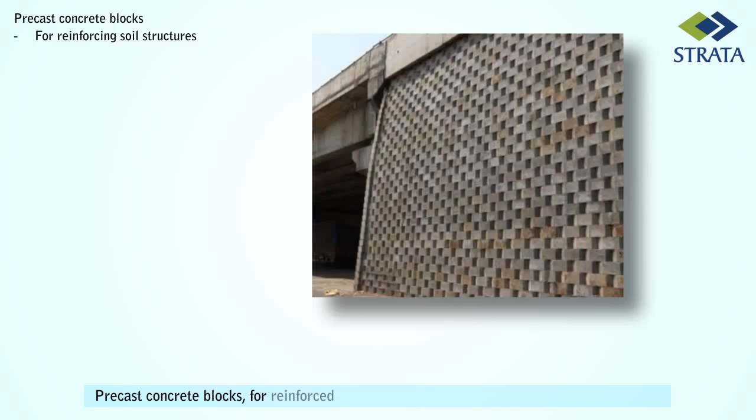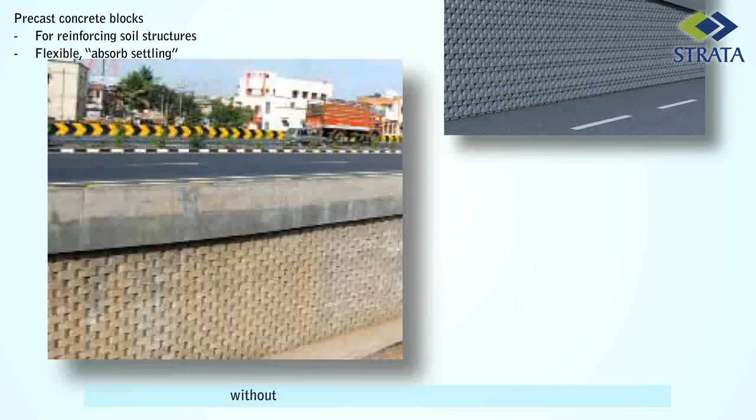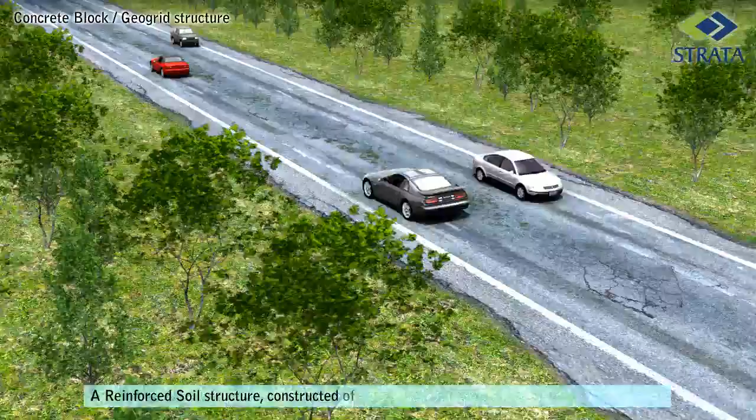Precast concrete blocks for reinforced soil structures have been widely used globally since the 70s. These are flexible structures and are amenable to differential settlements without show of distress, unlike rigid structures. A reinforced soil structure constructed of soil, polymeric geogrids, and concrete blocks is less expensive and faster to construct and

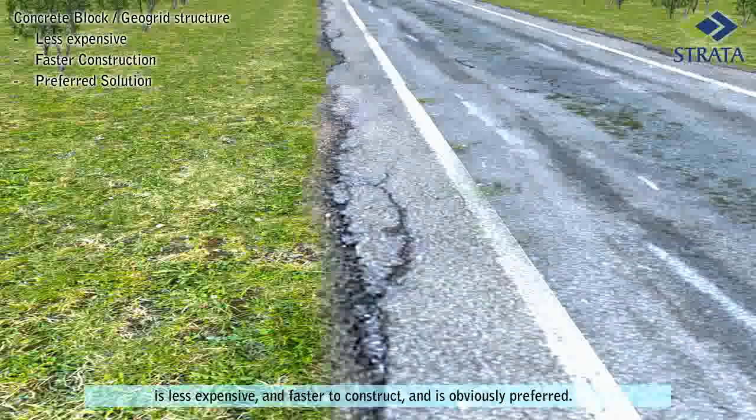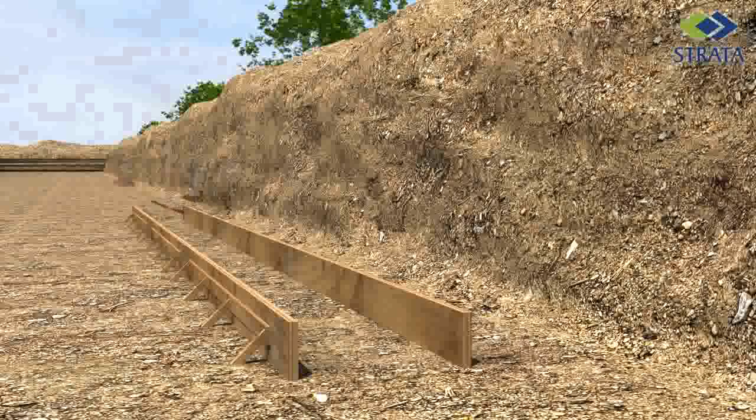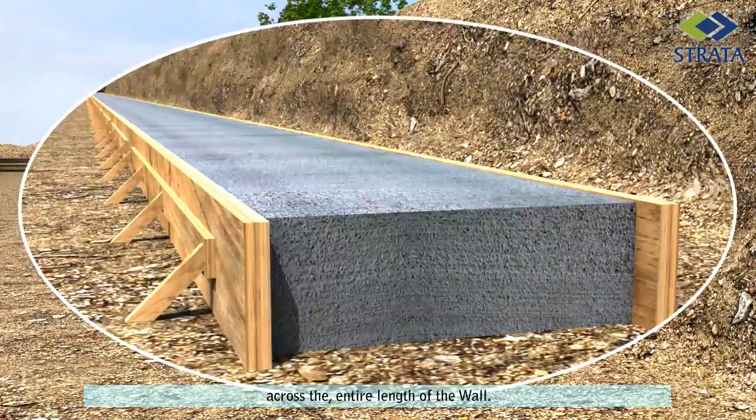is obviously preferred. After ground improvements, wall construction begins with excavating the foundation, typically 1 meter deep and wide enough for the reinforced zone. A PCC leveling pad of lean concrete is now poured with perfect alignment across the entire length of the wall. The first layer of blocks are laid and carefully aligned on the PCC pad.

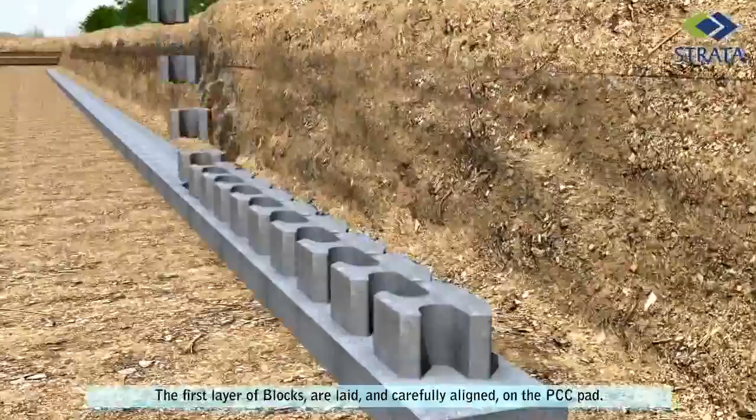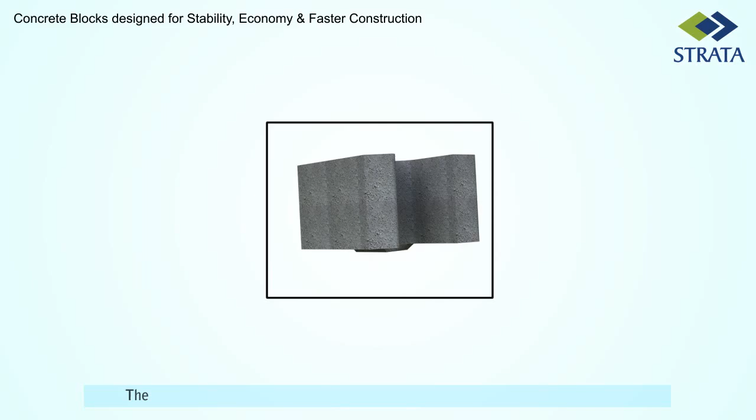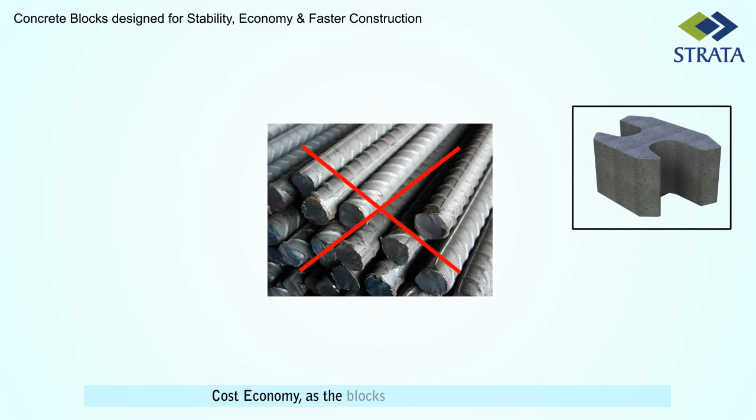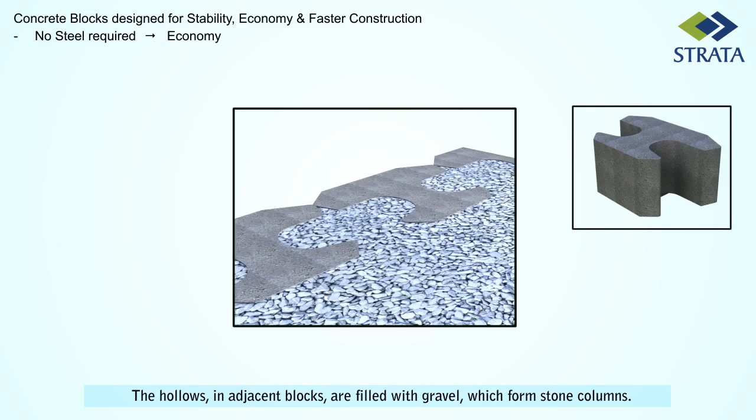Now, let us look at the blocks in greater detail. The concrete blocks are uniquely shaped to provide both stability and economy. Significant benefits include cost economy, as the blocks do not require any steel. The hollows in adjacent blocks are filled with gravel, which form stone columns. This contributes to the stability of the fascia.

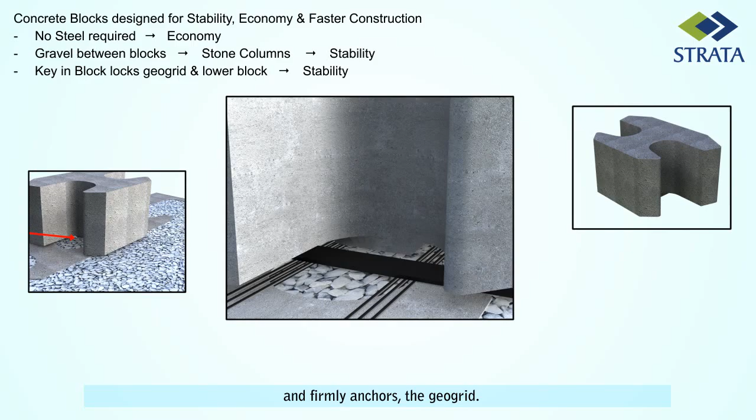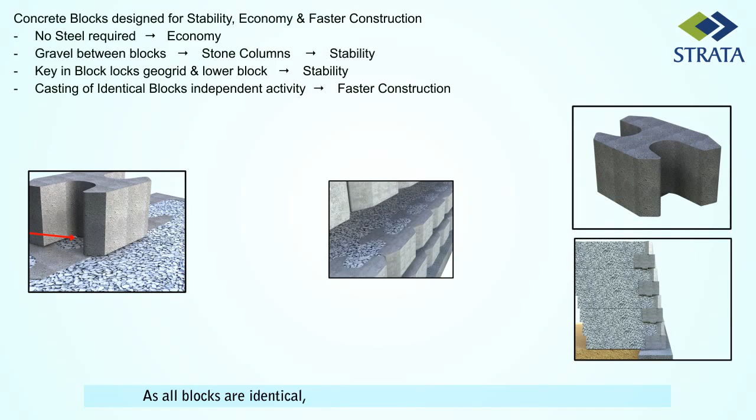The key at the bottom of the block fits into the cavity of the lower block and firmly anchors the geogrid. The position also ensures a backward batter. As all blocks are identical, casting can commence prior to design approvals. This reduces dependencies, resulting in speedier execution.

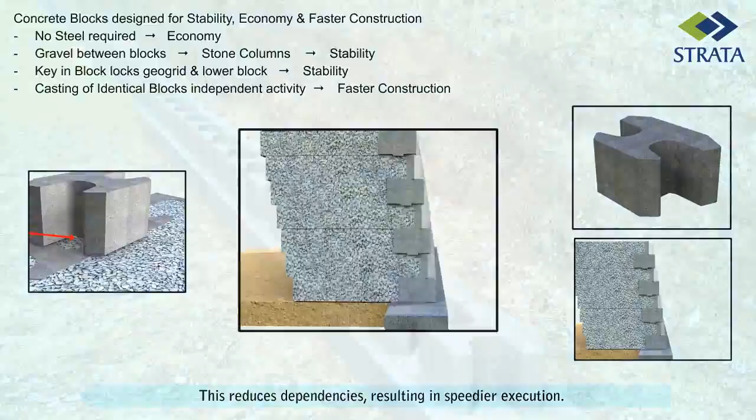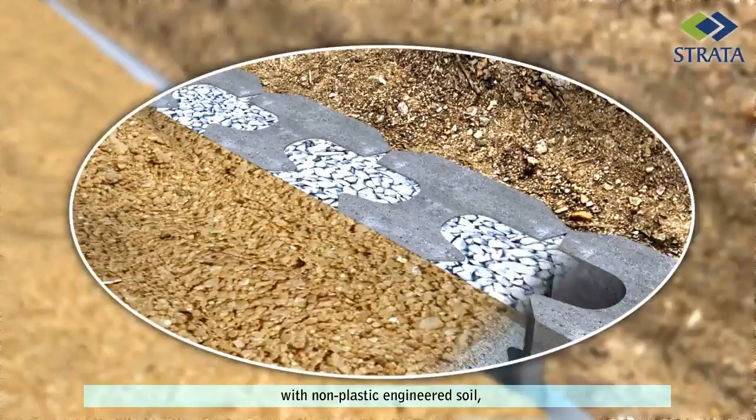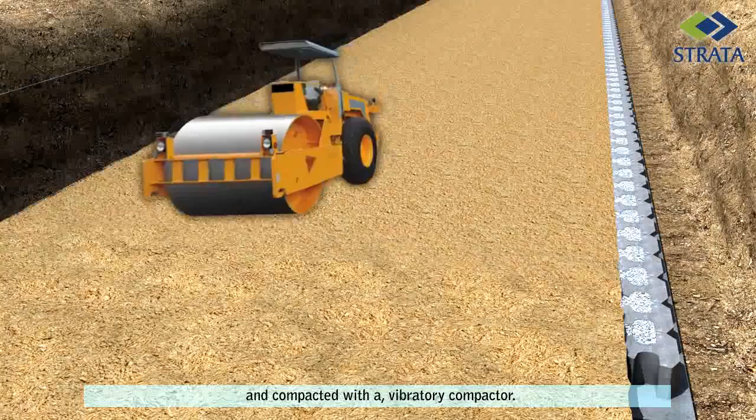After the first layer of blocks, the reinforced soil zone is now backfilled with non-plastic engineered soil and compacted with a vibratory compactor. The first layer of geogrid is placed side by side without overlaps, covering 100% of the reinforced soil zone for a safe and robust design. The geogrid is pulled taut and positioned in place with wooden stakes.

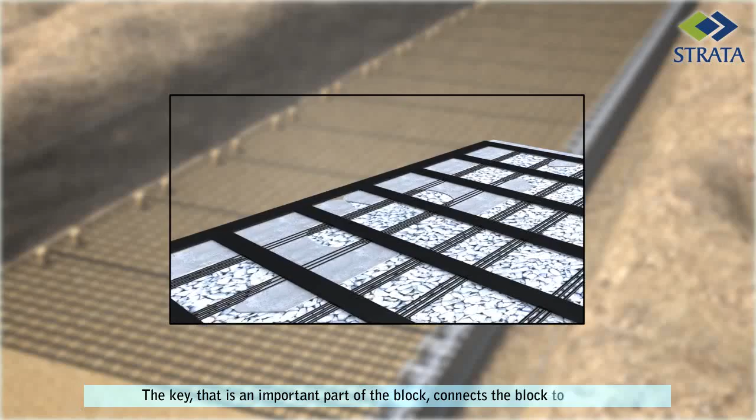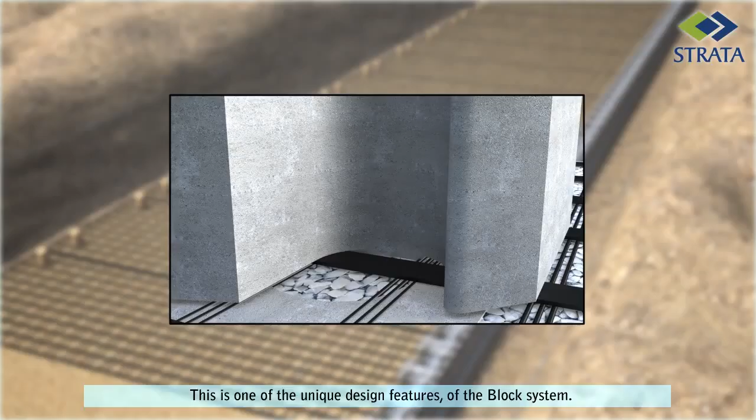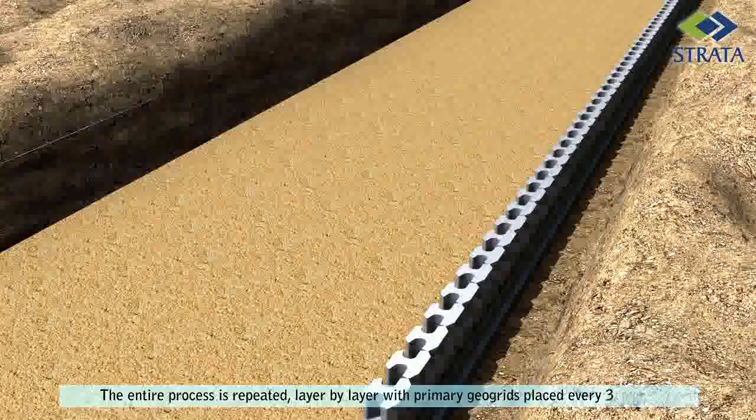The next layer of blocks is now laid. The key, that is an important part of the block, connects the block to the grid, increasing the frictional resistance for a better pull-out value. This is one of the unique design features of the block system. The entire process is repeated, layer by layer, with primary geogrids placed every 3 layers. Based on stability considerations, short secondary grids may also be placed in between layers.

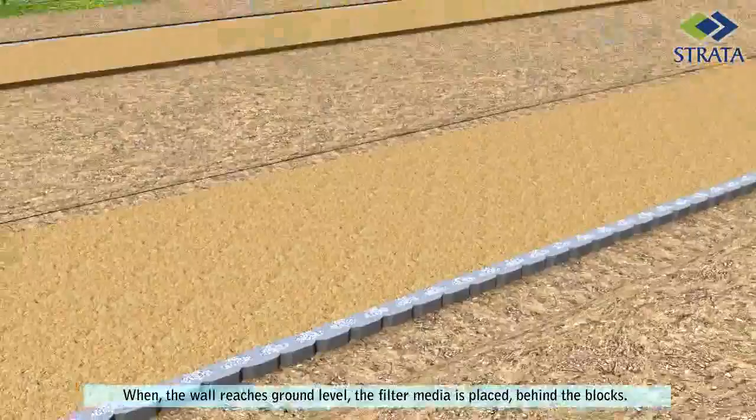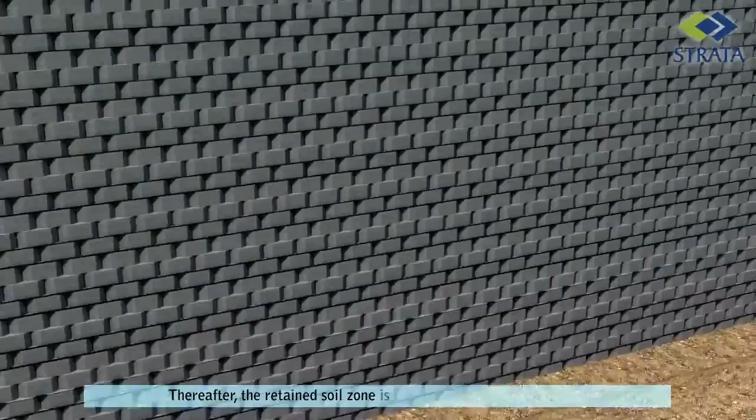When the wall reaches ground level, the filter media is placed behind the blocks. This acts as a drainage zone and relieves the structure of pore water pressure. It is self-compacting and does not require heavy compaction equipment. Thereafter, the retained soil zone is backfilled as per specifications.

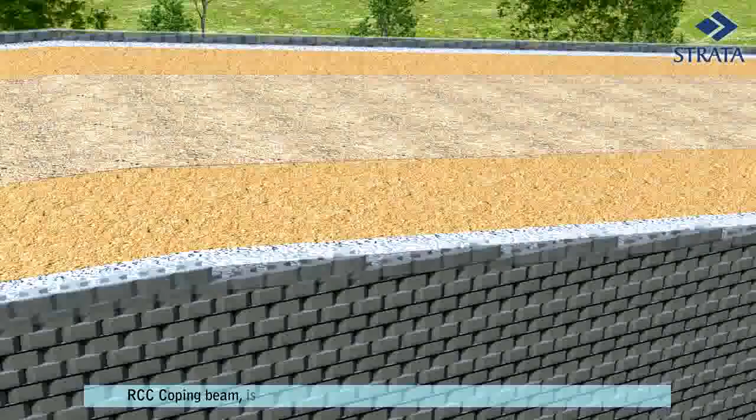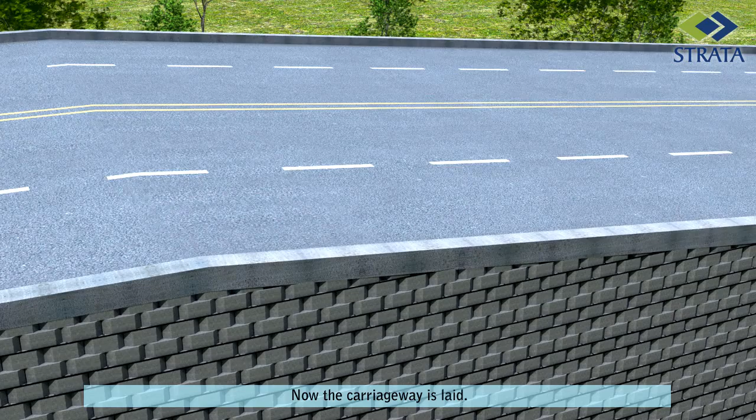RCC coping beam is cast along the top row of the blocks to smoothen the steps and align with the carriageway. Now the carriageway is laid. Finally, the crash barriers are placed into position, the pavement is laid, and the medians are constructed. The carriageway is now complete.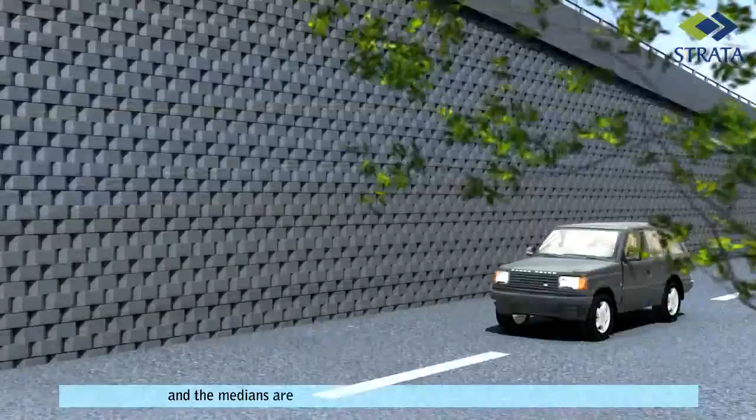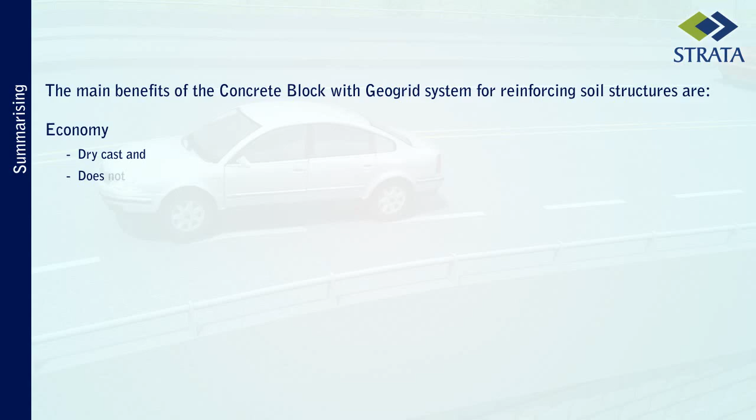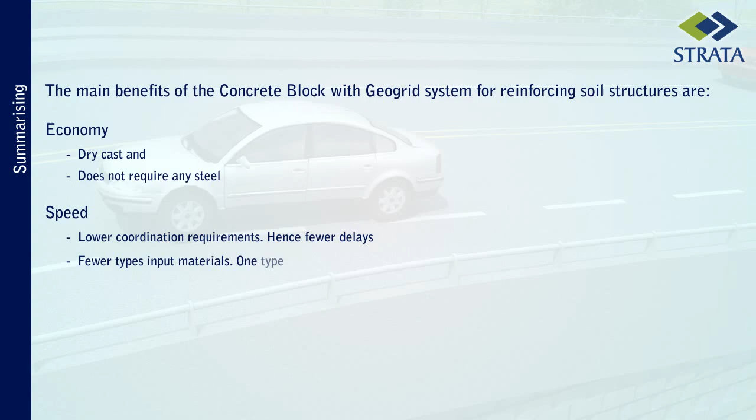Summarizing, the main benefits of the concrete block with geogrid system for reinforcing soil structure are as follows. Economy, as it only requires dry cast and does not require any steel. Speed, as it has lower coordination requirements, hence fewer delays. Also, it requires fewer types of input materials, one type of block and the geogrid, hence fewer outages.

And as it is a simple installation, it is an extremely fast construction. Finally, it results in a robust system, as stone columns are formed by gravel in cavities and the presence of secondary geogrids. This provides perfect fascia stability. With 100% grid coverage, it provides a robust design.